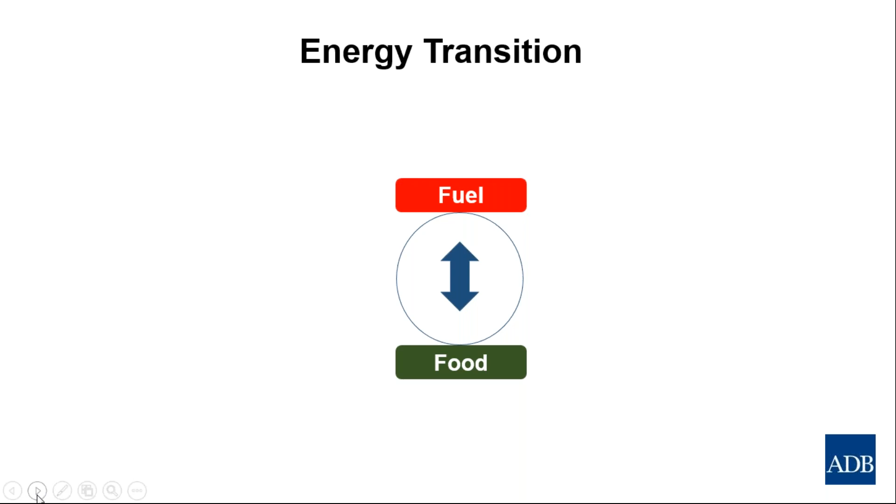When we talk about energy transition, the common thing you hear is food versus fuel. The bioenergy dispute in the United States between ethanol production and tortilla manufacture in Mexico was a great example of it. Most people think that's the big argument, but in fact the argument is a lot more complex.

There's an interplay between fuel, chemicals, fertilizer, food, waste, and energy. Inside that process, where you see this multi-pronged arrow, things transfer from being a waste to being a fertilizer, or from being a waste to being a fuel, or from being food to energy in the case of biogas. There are a number of activities where things are interchangeable, and understanding that interchangeable component means we can spend time and create wealth by transferring materials from one use to another. That's how we define waste to energy: getting the optimal use out of materials in your economy.

We'll start off with biogas. Biogas is very, very old. The process is about 120 years old in industrial processes, but as a human function and as a function of animals, it's been going on for a very long time. The oxygen atmosphere we have on Earth, about 19% oxygen, is somewhere around 600 to 700 million years old. Prior to that, we had a very low oxygen content of 2 or 3%.

The bacteria that lived at those times were mostly anaerobic bacteria, which is why many of them are called archaea. These are the bacteria that naturally occur throughout nature. So what we're looking at is a very simple process to convert carbohydrates, fats, and proteins by hydrolysis into sugars, fatty acids, and amino acids, all the way down to acetic acid, and then down to methane and carbon dioxide. So it's not just one bacteria, it's a family of bacteria.

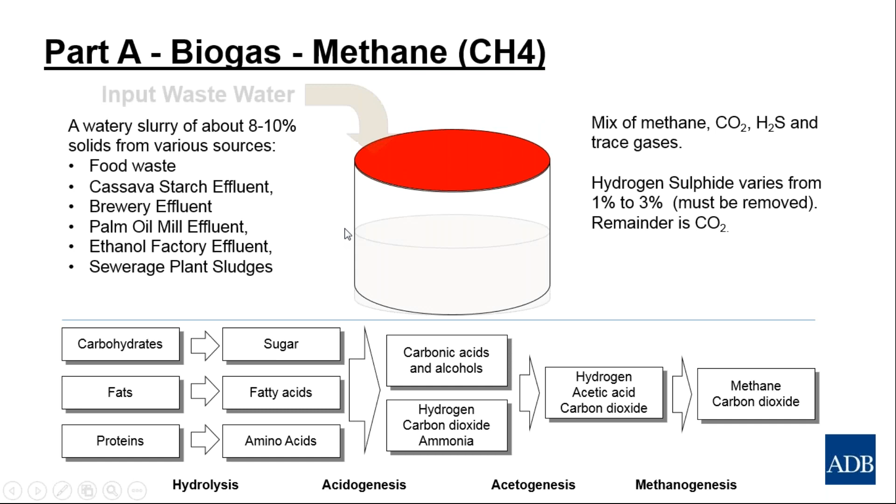To do it is really quite simple: you need a tank, you need a lid, you need to introduce the effluent, normally at about 8%, so it's very similar to porridge. You then need to agitate it. Over a period of time you'll produce biogas because there are naturally occurring anaerobic bacteria. The trick with biogas production is to choose a process that accelerates it by making methanogens come into contact with food nutrients more quickly. And of course you'll get a slurry out of that, which is a biosolid.

You can get that from food waste, brewery effluent. I was recently in Uttar Pradesh to see a sugar refinery on the back of DCM Shriram, a biogas plant on the back of their factory there. Also ethanol production, sewage sludge plants in Karachi, Pakistan. ADB is looking at doing projects on sewage sludge and cattle effluent in Karachi to create fuel for buses on the Red Line, which we're pitching at the moment. So there's a number of uses for this technology that ADB is employing.

One important point is the presence of hydrogen sulfide. Hydrogen sulfide is a very potent poison and has to be removed. It can be removed biologically, but it has implications on equipment when you want to make electricity, or if you're using boilers, it can affect the boiler surfaces.

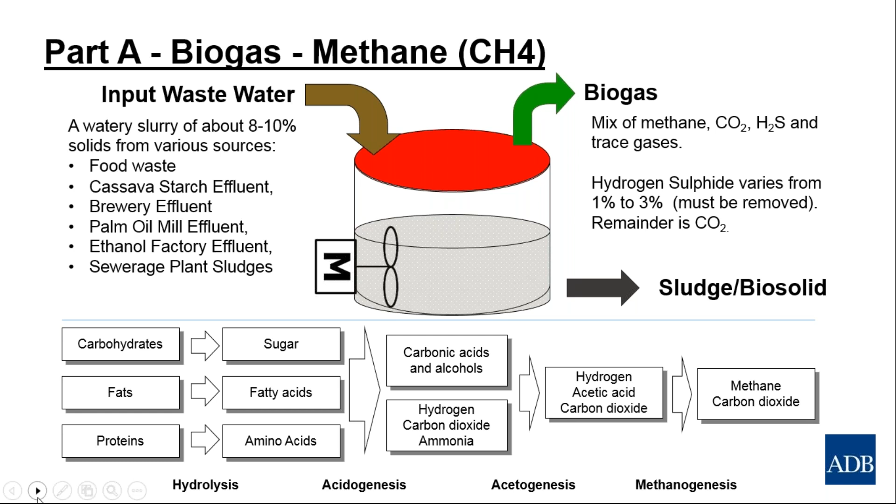These are the sorts of things you can make biogas from, and biogas content can be 30%. Landfills are notorious for having poor gas production, and the gas varies. You can also make it from factory wastewater. There's a lot of work going on in palm oil mill effluent, cassava, ethanol, food processing, food waste, animal feces, and of course sewage.

A key term in the production of biogas is COD, chemical oxygen demand, because there's a direct relationship between chemical oxygen demand and the production of biogas. There are some formulas related to the inhibitory substances that slow it down, but generally speaking, a palm oil factory might yield 65% methane, while a sewage plant might yield 25%. So it's a very well-defined and well-developed industry.

You'll hear some terms about the different types of bacteria. If you look on the right, you'll see a photograph from Argentina showing anaerobes interacting with food. You'll see that the anaerobes are quite small, and they are intrinsically lazy.

Anaerobes will only eat when food is put in front of them. So their life is eat, reproduce, fall asleep, wake up, repeat. It's probably an idealistic existence, but it would be a bit dull.

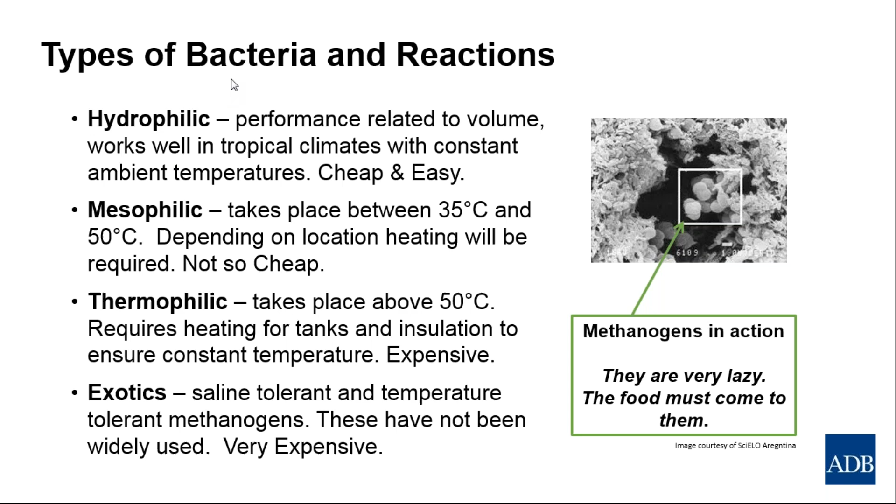So the process of making biogas with an in-ground reactor is quite simple. You mix in the wastewater, you mix in any additional nutrients - in this case there was a root cake available from the factory owner, so we could increase the biological load. You put it in a reactor, create turbulence, and move the materials around so they interact with bacteria. You produce gas.

That biogas is wet and has hydrogen sulfide in it. You put it through a condenser to dry it out, and then through an H2S scrubber to strip out the H2S. You can vary the locations of condensate and scrubbing depending on the use and how you configure your plant.

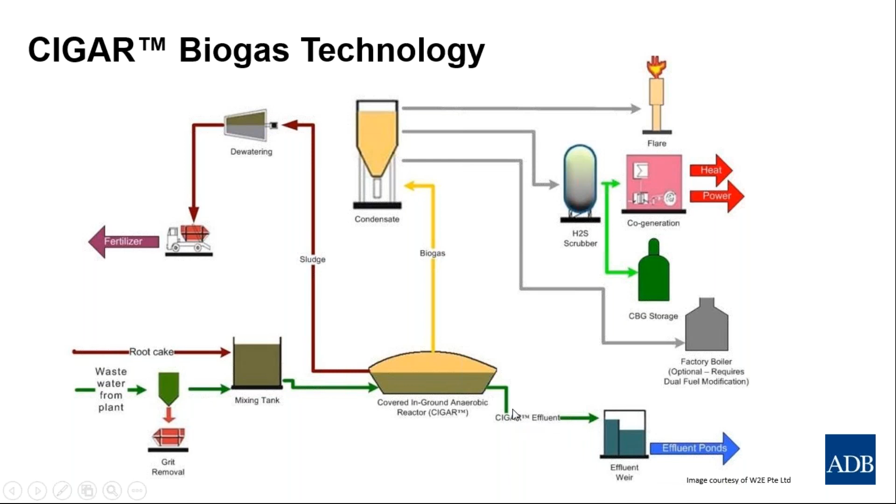It normally comes out at about 3 to 7% solids, depending on how much water you're using, and you want to get it to somewhere about 18 to 24% solids so it can be transportable and usable. Then of course you have some effluent where you might have 5% or 3% of the COD load left, which then needs to go off to ponds to be treated.

So here's some of the numbers, and there are three columns here. One is where the factory was operating at 55% capacity. It couldn't get access to energy because Electricity Vietnam was providing energy from across the border, and with cassava starch, the cassava rots over 3 days. So if you don't have energy for 3 days, you've bought roots and you can't make money. So the factory wasn't making much money.

Just at 55% capacity, by providing a stable electricity source, the project added $800,000 to the factory's profitability. And in fact, it allowed them to purchase more roots, and as a result, it basically created $1.3 million worth of additional profits for the factory owner.

Now, there are a few points I should note. The emissions component here, emissions of carbon dioxide - at that stage, the price the project secured was $14 a tonne. This was in 2008, starting 2009, just before the collapse of the carbon markets.

Those prices are no longer available, but still it's a significant increase in profit just for doing biogas. So if you want to have a look at those numbers, I'm sure you will have some questions, and I'm happy to answer some of those later on after the presentation.

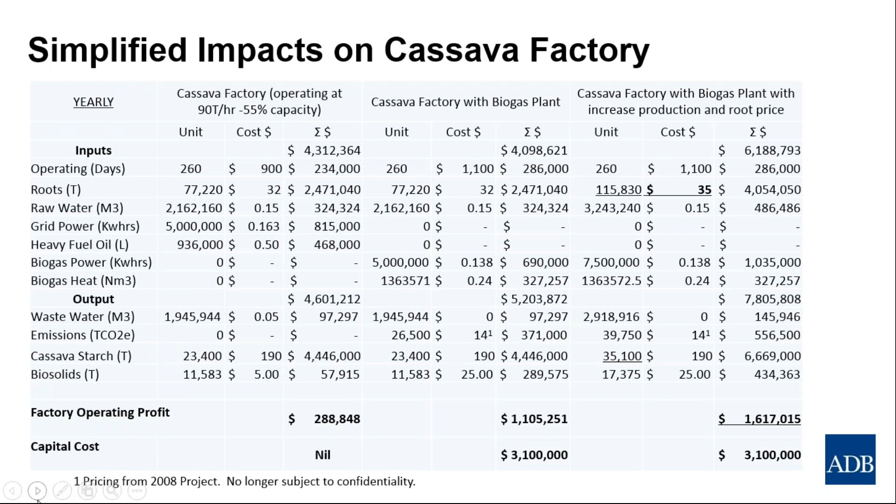If you look at the social impacts, farmers don't want to plant a crop that they can't sell. As a result, because the factory wasn't buying as much root as normal, farmers were planting different crops. When the factory started operating, they started planting more cassava because they knew they could sell it, plus it was a crop they made money on and it was easy for them to manage.

As a result of the factory being upgraded, not only did the factory owner make money, but local farmers made more money, because there was a virtuous cycle: if the factory is more profitable, the farmers will get higher prices or be able to sell to the factory because the factory will want to make more money. There was an increased root supply of cassava, which meant more biogas, which meant more electricity, which meant the factory again was more profitable.

So it stabilized. The factory at the moment is looking to convert its entire output of native starch to make compostable bags and cutlery. They're in discussion with a Taiwanese group.

This project was very interesting because of the biogas plant, this is now a potential target for a buyout where it can be upgraded to a very clean and green asset. So the factory owner not only got an increased profit, but the valuation of the factory went up in terms of what he could actually sell it for. So that deal is in process at the moment.

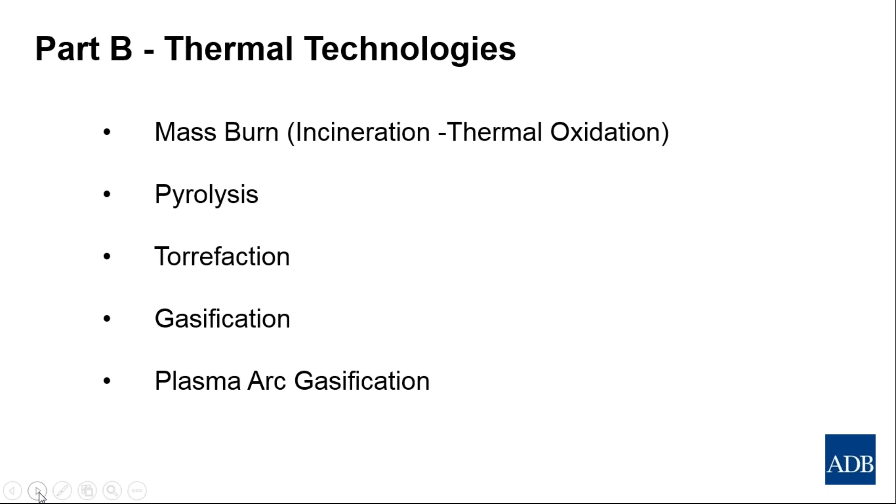And then there's, of course, plasma arc gasification, which everybody raves about, and many companies like Siemens have played with, but it is still not a commercially viable technology at this stage, though it may change.

So mass burn is very simple. You prepare your feedstock, you put it in the boiler, you have bottom ash that comes out, you have energy in the form of heat, which can make steam, and that can be used to make electricity, or the steam can be transferred off for heat use. Then you have entrained gases and entrained particles in the flue gas coming off from the combustion process. They have to be cleaned out, and in some cases you'll have fly ash, which can in many cases contain toxic materials, and I'll talk a little bit about that in a minute.

So it's proven technology. Fixed grate boilers have been used for over 150 years. It's very solid technology. Most of the boilers made out of Japan and China are pretty much using fixed grate mass incineration because it's simple. I know there are companies doing more advanced gasification, and I'll talk about that in a minute, but generally speaking, this is the least cost, easiest operation to use.

Depending on what you have and how your process works, you might have 10% of your mass as ash. You'll have bottom ash, which we were talking about before, that can be used to make bricks. In China, they're making bricks out of it, depending on what is contained in it.

And then there's fly ash. Now, fly ash is a real problem for incinerating anything with chlorine, because when you have chlorine in the presence of oxygen between about 250 degrees and 900 degrees, but especially between about 450 degrees and 800 degrees, you make a family of chemicals called dioxins, and you also make furans as well, which are persistent organic pollutants.

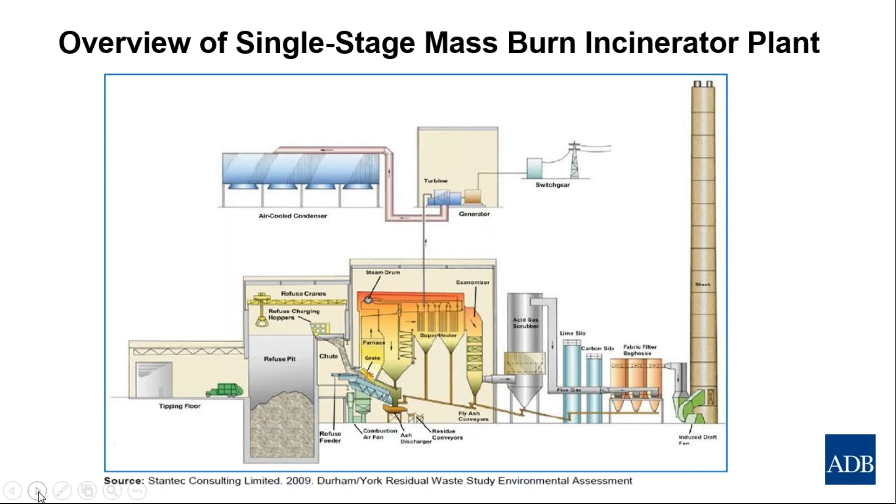I was recently at an incinerator in China, and in front of that they had a very, very large billboard where they were telling in real time what the HCl, dioxin, and other gas pollutants were coming out of the incinerator. I'll try and share that with the audience at the end of the presentation. In China, every incinerator must in real time have a billboard in front showing these results, and it must be certified by a third-party body that the results they're giving are reliable.

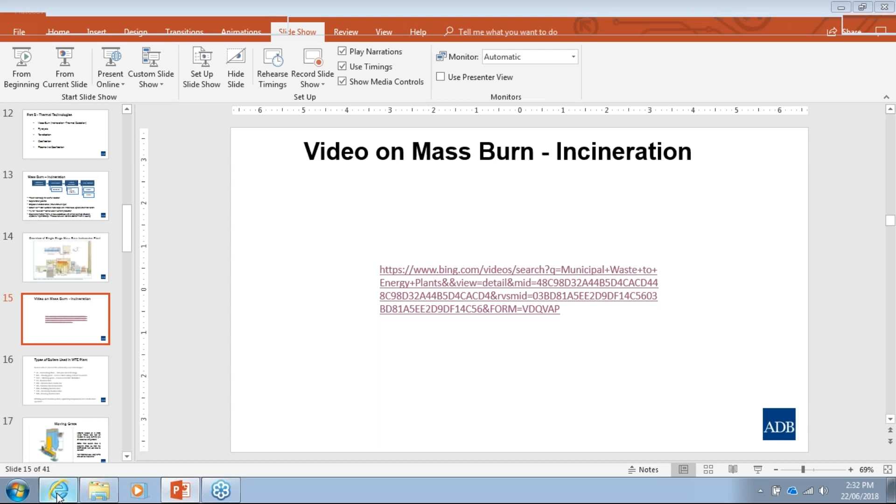This is an incinerator in Finland, outside Helsinki.

Please tell me if this is visible to people. Yes, it's visible. Terrific, thanks, Uma. It's visible, but we can't listen to the audio. Okay, well, I can turn the audio off. That's the easiest way to do it then.

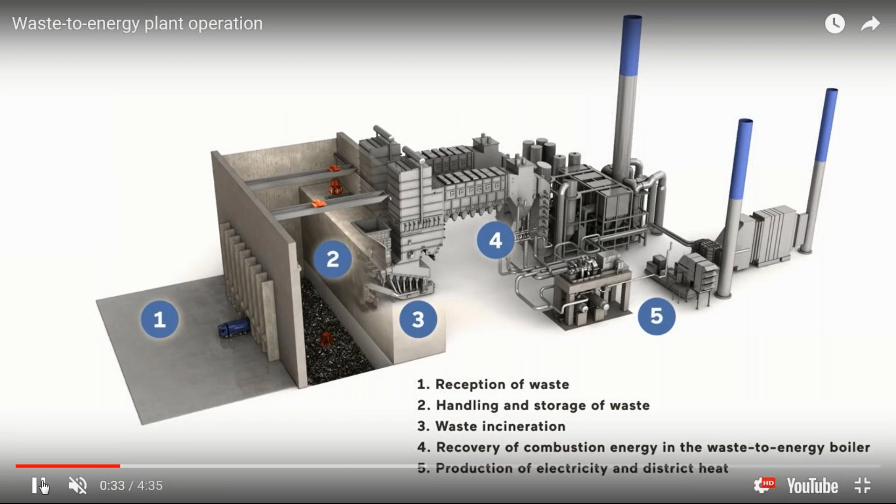So this is the basic structure of the plant, it has a large hopper. It treats about 350 tons of waste a day, about 140 truckloads. It goes into a hopper. The hopper normally carries 2 or 3 days worth of waste, and the operators use the hopper to a certain degree to dry the material out or break the material up.

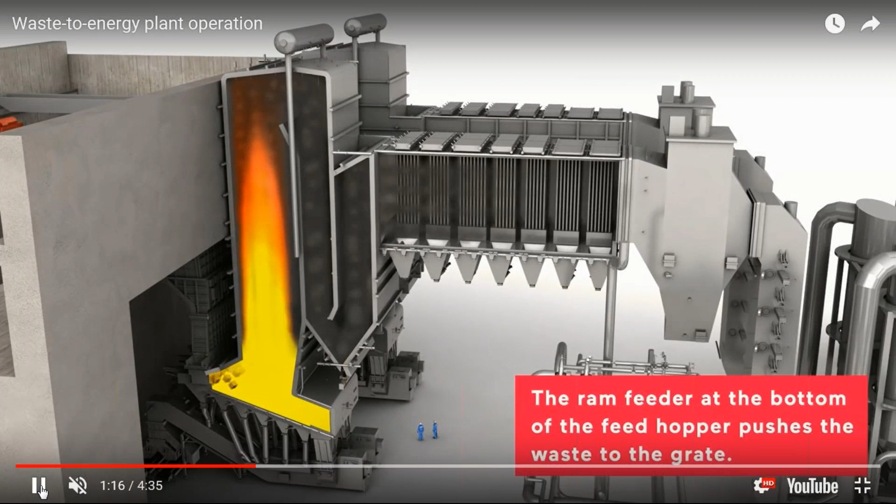It goes into the chute, and then it's injected into the boiler, and kept on the grate for about 2 seconds. That's typically what happens in an incinerator, and that's a good definition of what gets incinerated. So material burns, creates hot gases, and you'll see the entrained particles in the gases going through.

Now, that is a very, very important slide, and I'm going to stop there because it shows that at the surface of the grate, it might be 1100 degrees Celsius, but by the time it's got to some of the boiler tubes at the top of the stack, it's 900, and as it goes through baffles, it goes to 650, then 400, and then 220.

So basically, by the time the material gets to 220 degrees, it's not really producing that much dioxin. But in this process between the top of the boiler and going through to about halfway through this part of the equipment in ash removal, they are forming dioxins and furans. So that's something that means you have to have very good quality stripping of flue gas entrainment. So I'll start the video again and we'll go through.

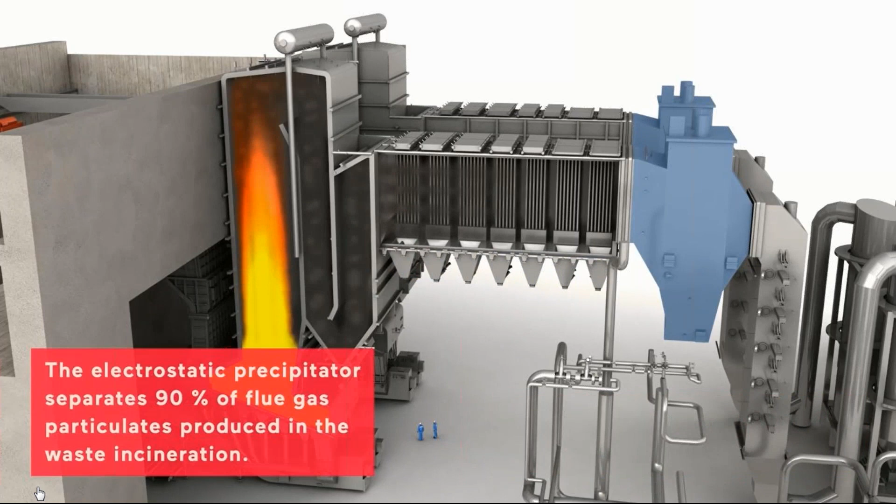So you'll see the gas going through. Fly ash is recovered in different stages of the process. Underneath the grate, you'll have bottom ash, which will fall out, but the fly ash is stripped out using a number of processes. An electrostatic precipitator, which is pretty much a big mosquito coil - I don't know if any of you have those mosquito zapping machines that are very common. ESP is pretty much the same as that. I know it's oversimplifying it, but that's what it does.

Then they use lime dosing. Lime counteracts the acid component of the gases and normalizes the material. And then you have bag filters. Bag filters are very, very important. Inside the bag filter, they'll put a reagent, and that reagent will lock up materials like furans and dioxins, and then they'll come out.

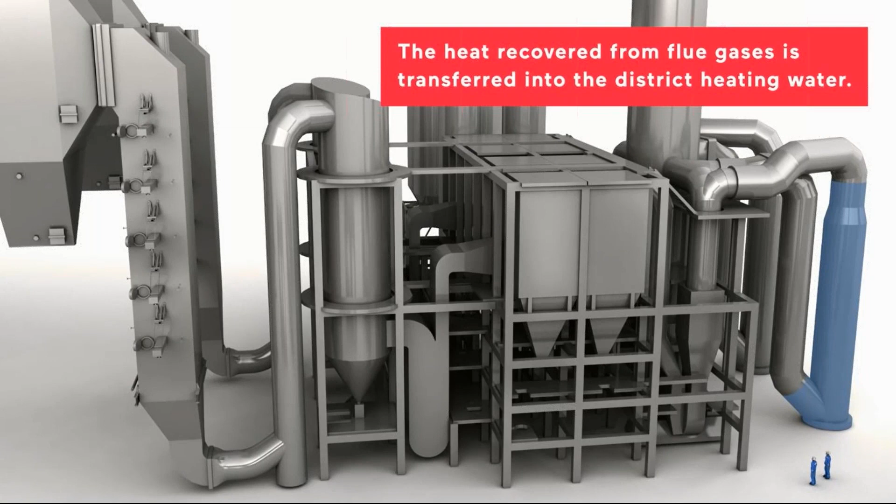Now, this plant has very high energy efficiency. It's collecting heat and then sending that heat around to the community as district heating. Very, very important process in Northern Europe because obviously heating costs are a tremendous cost. So by the time the gas gets released, it's about 50 degrees Celsius, which is still quite warm, but it meets all the European directives for release of gas.

So the issue with incineration is that whilst the process is energy efficient, it's expensive to build an incinerator. You also have an issue with fly ash, and fly ash is the limiting factor in its success in rollout. So a lot of the work we're doing at the moment looks at new solutions for how we can deal with fly ash, how we can chemically immobilize it, what we can do in terms of creating ceramics, and using hot isostatic presses and other activities.

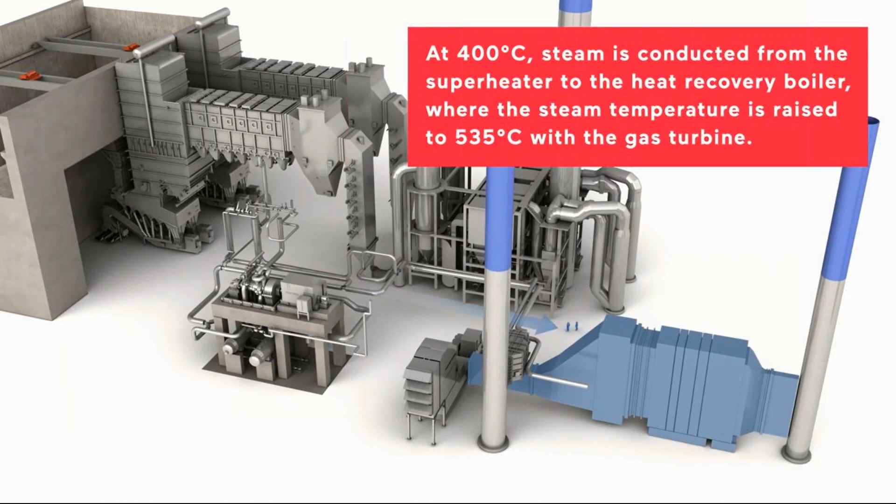So this talks about the heating and cooling system. Basically you're stripping heat out of the gas and using that, and then it goes off to a turbine, producing electricity for the local community.

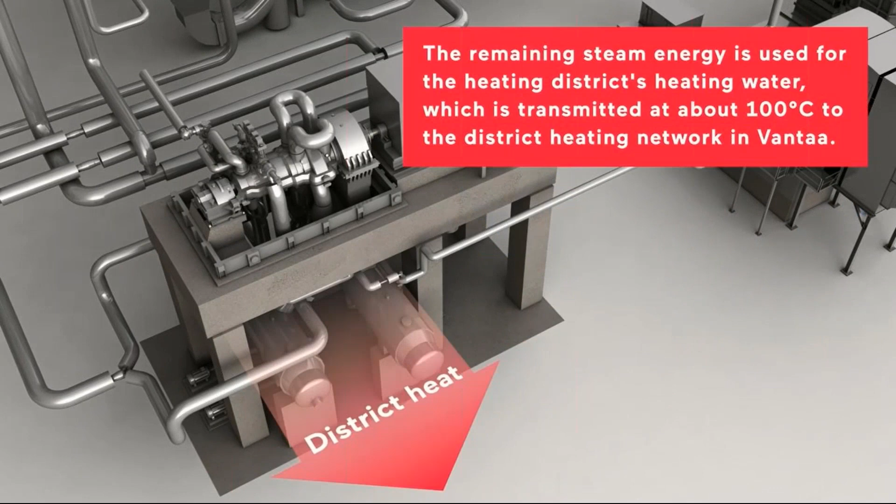But the district heating component of this makes this technology the most attractive. In China it's very well adopted because of its capacity to provide district heating. One of the projects we're involved in is looking at providing district heating and options for people currently using coal in the areas around Beijing, Tianjin, and Hebei. There's a large amount of investment in getting people area heating during the four months where it's very, very cold in northern China.

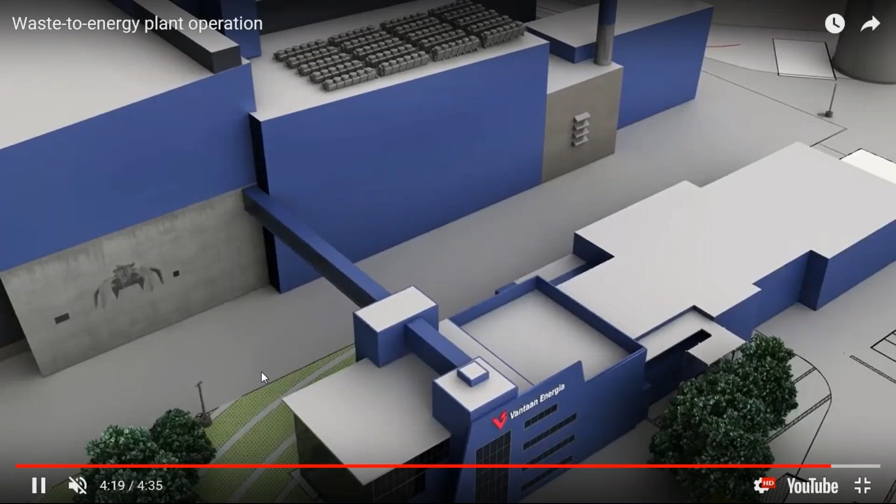This means they don't burn coal, so there aren't the levels of pollution that currently occur in Beijing. Delhi certainly has that problem too - I was in Delhi about four years ago and the pollution was very, very bad. So perhaps that might be some learning that can get transferred across.

So let's go back to the presentation, and I'll restart the slideshow. So we've done that slide.

Now talking about grates - this is simplified. I know there'll be experts on grates in the audience who might say this isn't exactly a good summary, but if so, I'd be delighted to have your comments if you want me to change this presentation internally. There are different types of grates: fixed grates, moving grates, vibrating grates commonly used in palm oil production for boilers, fluidized beds, and gasifiers actually use fluidized beds as well. So there's a step between being a boiler and being a gasifier, even in these technologies. The technology varies in terms of residency time, operating temperature, and combustion dynamics, and those are the determining factors of which technology you might want to use.

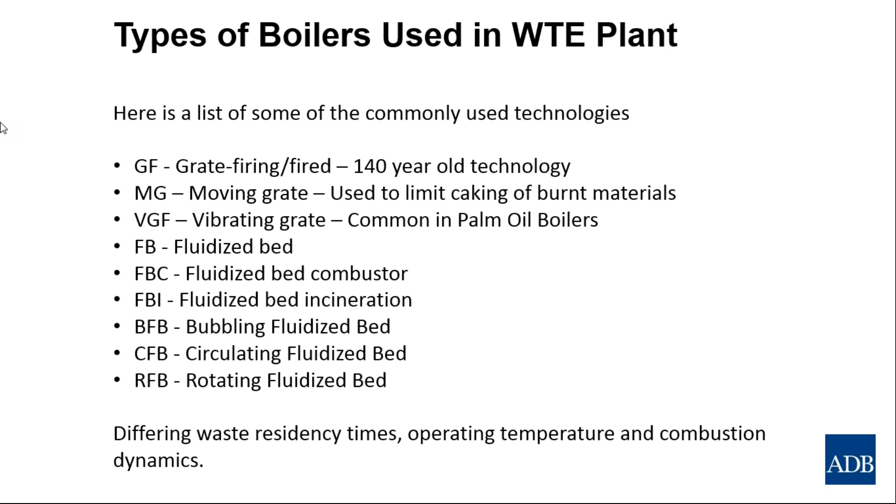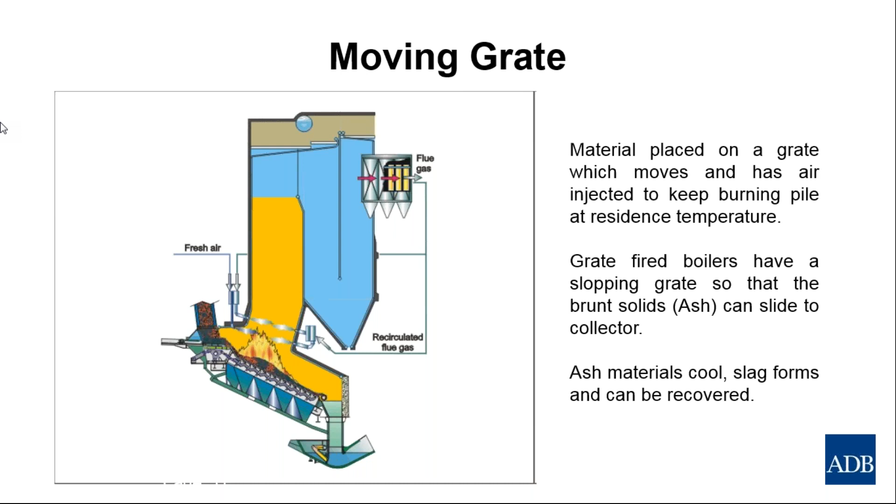So a moving grate is pretty simple - it's basically placed on the grate and it burns, that's pretty much it. The bottom ash comes off, and you may have some slag depending on what's entrained in the materials. If you're doing something simple like wood chips, empty fruit bunch, or cassava, you won't have a lot of gas treatment needed because you're not likely to have entrained dioxins or entrained chlorines. But if you look at a bubbling fluidized bed, you'll see that process varies.

Excuse me, sorry, we just had a power outage. Can you hear me? Yes, I can hear you and I can see the screen as well. We just had a power outage in Manila. Oh, it's fine, we at South Asia are also used to these power cuts. Yeah, I know, but it was pretty good because the power came back on in literally a quarter of a second, so that was very good.

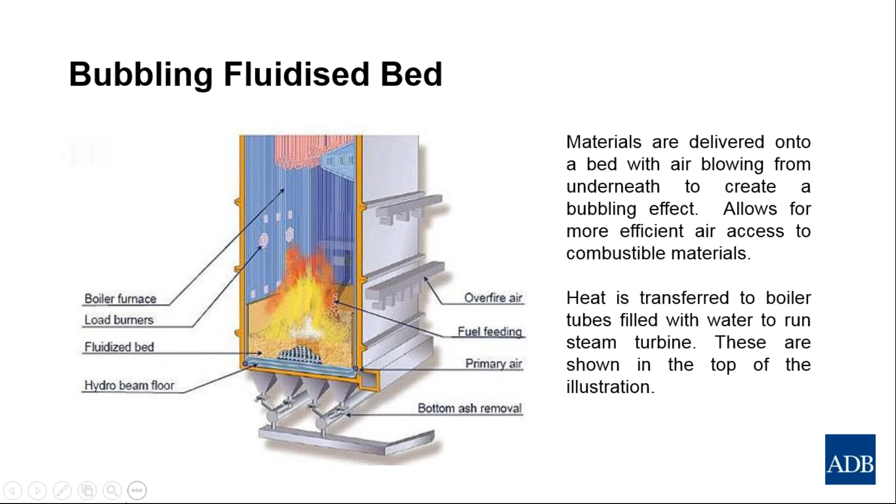So key terms - many of you will know these, but I'll go through them again. Megajoules is a measure of energy: high heating value, lower heating value - how that is determined varies. There's a difference between the high heating value and low heating value of a material. Nitrogen oxides - NO2, NO3, NO4, SO2, SO3 - sulfur oxides. CHONS is very important: the relative proportions of carbon, hydrogen, oxygen, nitrogen, and sulfur are a determining component of which particular technology might be better.

Heavy metals - everybody talks about them, but here I've actually specifically spelt out what they are: cadmium, mercury, lead, arsenic, manganese, chromium, cobalt, nickel, copper, zinc, selenium, silver, antimony, and thallium.

Just as an aside, I was recently in the Marshall Islands looking at a project, and there was a technology introduced there to mass burn plastics waste in the open, which we gave some very strong commentary about, saying that wasn't a great idea. When the ash was tested, it had a very high chromium content compared to everything else. That was quite a remarkable outcome, we thought.

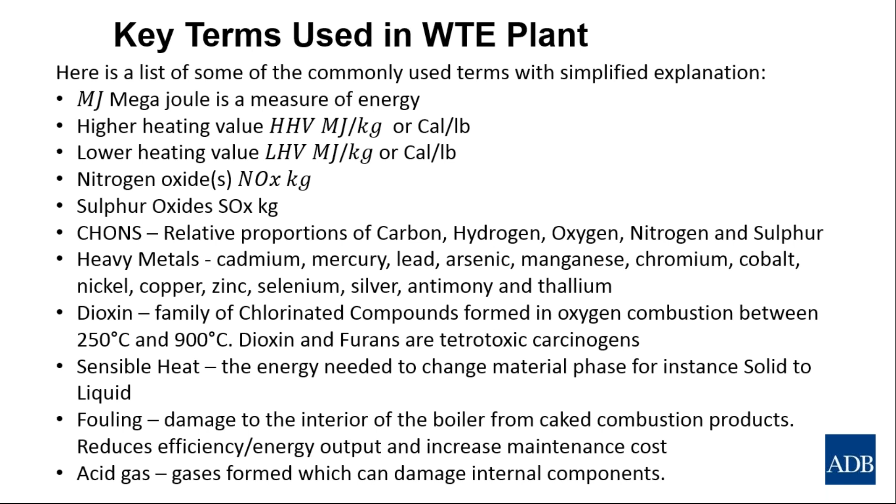Fouling is where you get caked materials that look like they're sandblasted onto the interior of facilities, and that has an implication on the operations and maintenance component. Acid gases are gases formed which are quite damaging to internal components, and that's because of the presence of sulfur and other materials.

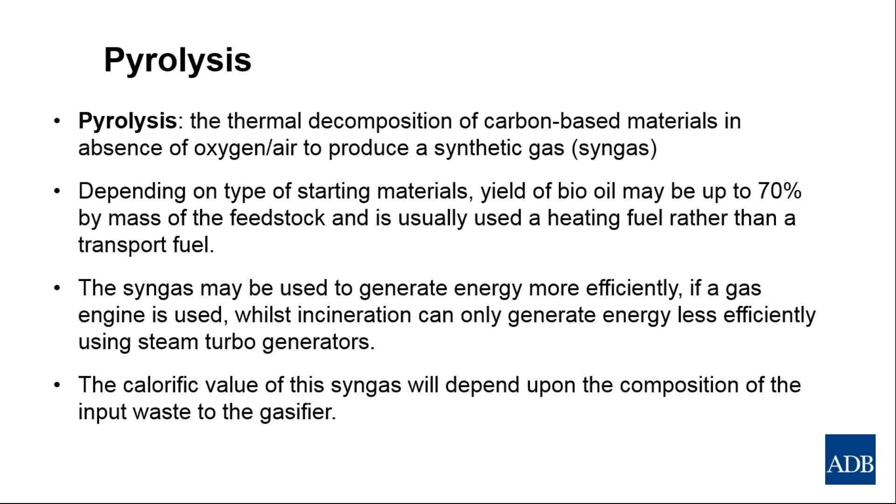Pyrolysis is thermal decomposition in the absence or near absence of oxygen, and it produces syngas. I know that India, especially Ankur Scientific, are extremely good at making small gasifiers for agricultural applications like rice husk - they're very popular in Southeast Asia. So this process of gasification producing syngas is well known. With pyrolysis, you don't make as much syngas, you actually make more bio oil, and you also have tars as well. The next step up is gasification, and that process is very popular in Southeast Asia. Again, it's just a difference in temperature and a slight difference in process, but they're a family of materials.

Now, people will tell you, 'oh, we don't have any oxygen, so we don't create dioxins.' That's not entirely true - you can't say they're not produced, you can only say they're below detectable limits. I've seen documents from suppliers in various parts of the world claiming no dioxin is produced, and I think you should be very careful of that, because there's oxygen in the container, in the materials, when you start the process.

Torrefaction is another process which occurs at a slightly lower temperature. It's used extensively in Australia to deal with dead animals from a biosecurity point of view. Large chicken farms and large beef farms have a lot of dead animals, and a lot of waste, which is obviously a biohazard under Australian law. So what they do is treat it in a pyrolysis process, and that's then able to be used as a high surface area biochar, which is very useful for entraining nitrogen-fixing bacteria and other things in the soil. So it's sought after by farmers to buy that product.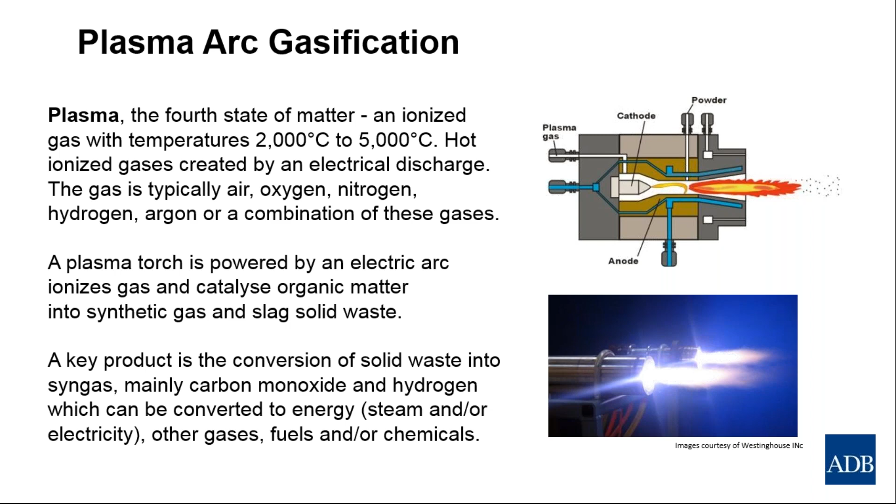Plasma arc gasification - if we lived in the world of Star Trek, this would be the ultimate technology. It decomposes everything down to a glass slag and maybe a bit of entrained metals. The only problem is it's about 4.5 to 6 times more expensive than currently available technologies, and also extremely difficult to operate. In the mid-1990s, Siemens had an explosion in East Germany that killed 6 people, 2 of whom were PhDs working on the technology. It was originally developed by the Russians, as my understanding goes, and the space shuttle actually uses a plasma arc made by Westinghouse, injecting a spark to light the bottom of the space shuttle so it can take off.

This is a process from a project in Malaysia, on the site of a paper company in Pahang, where they have fuel storage. The most important thing for these technologies to be optimized is the handling and feeding into the boiler.

In a large municipal solid waste incinerator, you have a little bit of flexibility about what you can do, but in these processes where you have a fixed biomass, fuel handling is very important to get optimal results. It's basically four stages: fuel handling, steam boiler, steam turbine and generation, and then water treatment within the configuration.

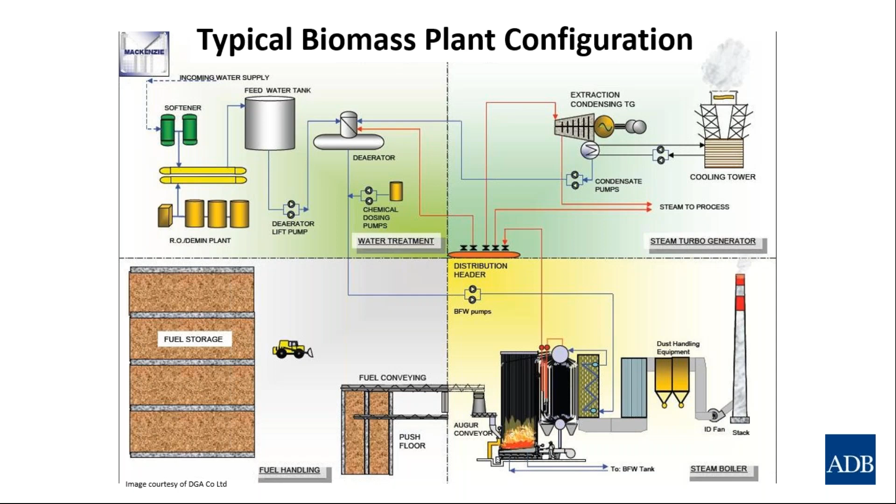Here's some numbers from this project. Again, it was 2008 - I can't show you things from the last couple of years because many are still subject to confidentiality, I must apologize for that. But three mills in this particular area were going to collaborate, and they made about $300,000 a year selling their empty fruit bunch off as fertilizer, which was good money shared amongst the people who managed the mill.

But if you look at combining the empty fruit bunch from these three factories, you could actually generate about 10 megawatts of exportable electricity, meaning operating profits of about $9 million based on the carbon price at the time, maybe 8 million without it. Electricity was in shortage in this particular area, so the payback was about 3 years - it was quite an attractive project.

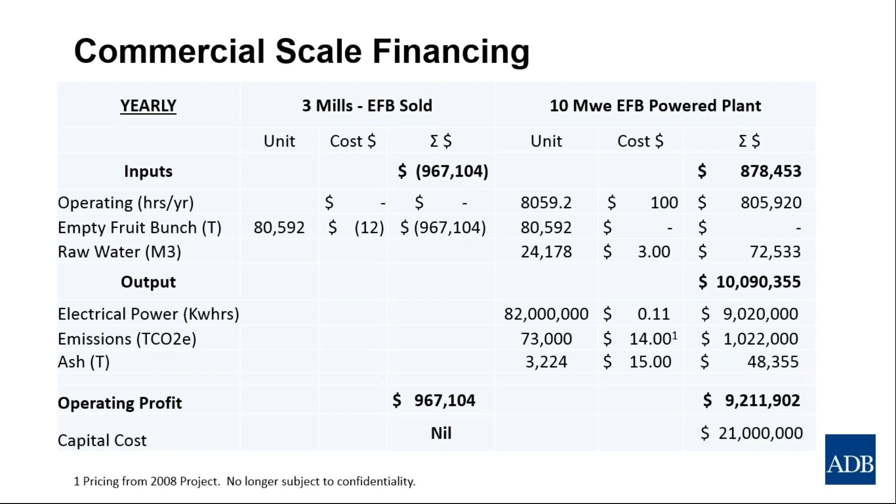A number of these projects were done. This one wasn't, because the three mills couldn't get on and had problems communicating with one another, which is a great pity.

When we talk about palm oil, I put this in for the edification of my colleagues. If you look on the right, you'll see that's actually peat land that has palm oil planted on it. Peatlands are major sinks for carbon, and anyone who's lived in Singapore or Malaysia has seen the haze caused by burning of these peatlands, which burn for weeks. That's a really big problem for the palm oil industry, and they haven't managed to create a functional business model to explain to international donors how that might work.

On the other side, there's a lot of people who've been lifted out of poverty from this. About 10 years ago, I remember sitting in the living room of someone in Central Sumatra telling me how 3 of his kids went to university and 4 ended up joining the military and getting educations because of his involvement in palm oil. So I think you need to look at the positive and negative sides of it. There's still a big argument about palm oil, but I think it's not so black and white.

As I said, the most important thing is fuel preparation for any thermal technology. If you have a gasifier and pyrolysis, you have very, very tight margins on the fuel and the moisture content.

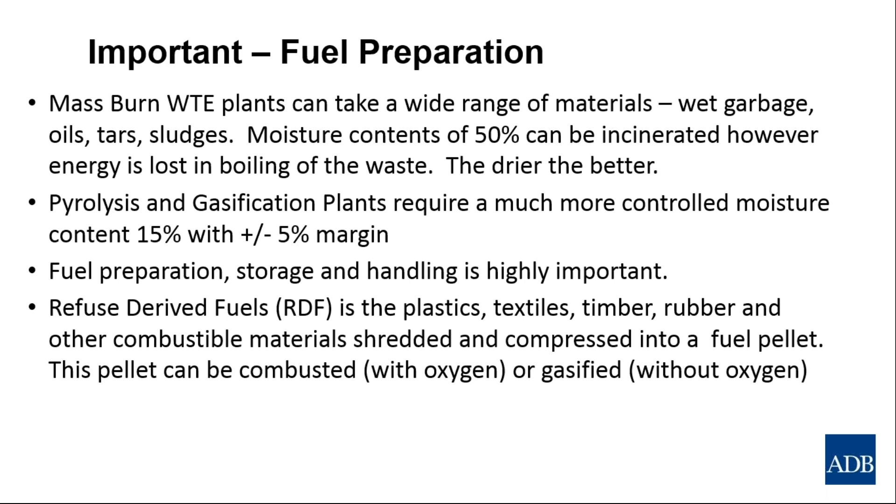One thing I haven't gone into much detail on is refuse-derived fuels. When you have plastics, textiles, timber, rubber, and other combustible materials, they commonly contain a lot of chlorine, specifically textiles and plastics. If you turn those into fuel pellets, you need to combust them in an area with controls for dioxin. But one other option is to use them in cement production - sell them off to cement factories, since they commonly burn car tires to generate heat for the cement-making process. So the RDF component works very well with cement mills without having to build large pieces of infrastructure.

Next is municipal solid waste - this is a different approach. This was partially tried in a number of places in India, and I'd be interested to get feedback from the audience. They had great difficulty operating the digesters because there were obviously some contaminants in the digesters, and also the digester is an agricultural, biological process.

It's not really like a car where you turn the engine on and the car runs. Sometimes the gas is produced, sometimes it's not produced as much. So it's a bit more like managing cattle than actually driving a car. To manage this process, you need a little bit of subtlety and a bit of patience.

But effectively, you take waste, you strip what you can out of it, you shred it, you pulp it, or you can put it through a trommel screen. But ultimately, what you want to end up with is an entrained amount of organics that go into a digester with as little plastic and as little contaminants as possible.

The process is very similar to what we talked about in the cassava factory, probably with a few more controls. But then you have a market for the recyclables. So it's a choice between building a large incinerator or building a smaller biogas composting type approach.

Many countries, especially India at the moment, and partly because of the closer relationship with China, are actually building incinerators to change the way people collect and run waste. We're seeing these types of projects come in, and we're not sure how that's going to work in India, because South Asia obviously has some very clear supply chains for the collection and handling of waste, so we're still working out how that will deliver.

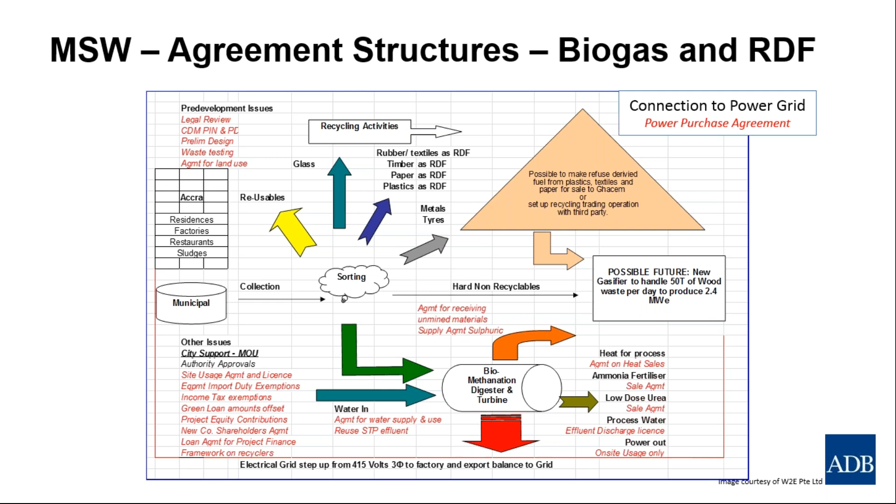So it's not an easy technology, and it's not an easy business to be in. It's a very important business, but it hasn't got the level of attention from the international community that perhaps it should have. In Ghana, they couldn't afford to build a large incinerator, but they could get access to about $56 million worth of capital cost. This project had an IRR somewhere around about 14 or 16%, which is not great, but it certainly passes the hurdle for economic analysis.

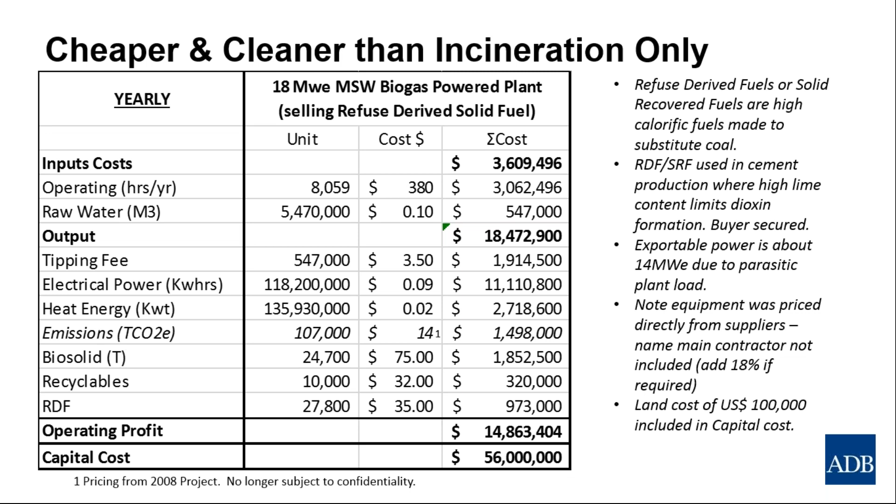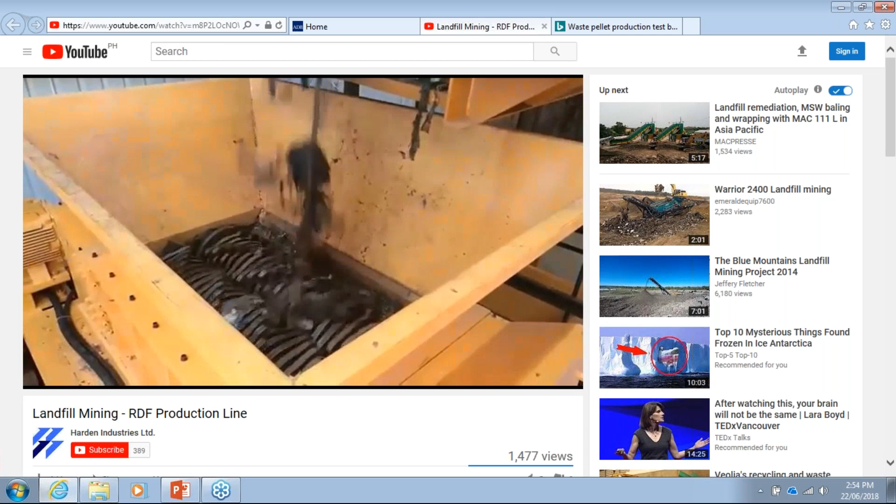That's not a place to fall into - certainly a very, very dangerous piece of equipment. Then that gets chopped up to a smaller size. They may even chop it up further.

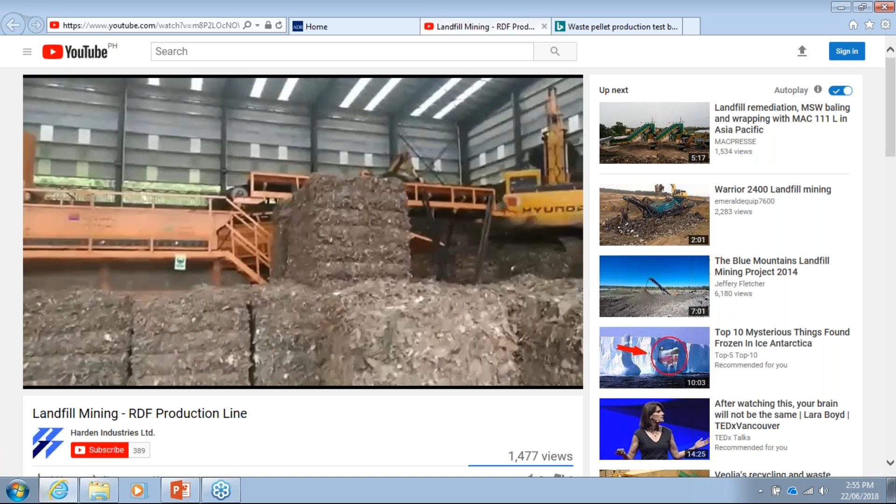And then they have a number of choices. In this particular video, this is a landfill that they've dug up, and then they're taking this material and baling it to turn into meter by meter bales. You'll see them baling it here, and then that gets shipped off to be incinerated. I'm not sure what the use of that is - it may be an incinerator, it may well be a cement factory, but that is a common process.

Notice the guy's wearing a lot of PPE. He's wearing safety equipment because there's a lot of material in there that's perhaps not so great to inhale.

Okay, so then I'll show you another one, which instead of doing a small bale, does a pellet. So instead of doing a meter by meter bale, you do a pellet. This is a machine in Thailand - all it is, is a rotating die, and it just makes a circular pellet, and you'll see the entrained solids and the plastics in there. That's a very small machine, and it makes about 100 kilos of pellets an hour.

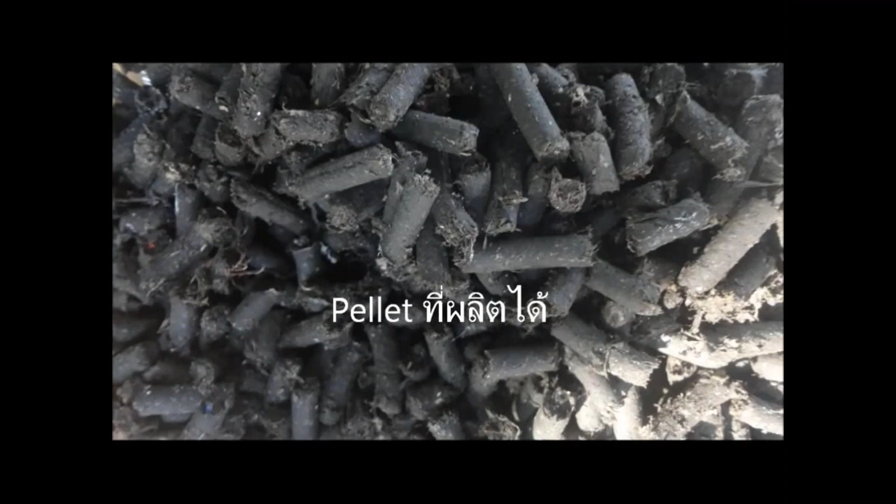That's used for shipping. It's a lot easier to ship in bags than to run the bales. Plus bags don't leak as much, and they sometimes use cassava starch to bind those pellets together, mixing it in so they have a discrete form. That pellet is a lot easier to burn because it's more consistent.

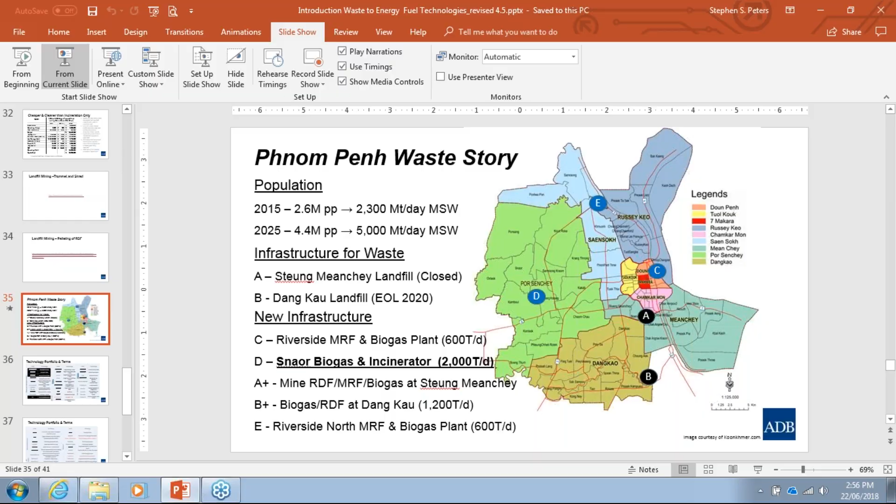So that's another type of technology. I'm going to turn that off and go back to our presentation. I wanted to talk very briefly about some planning. Phnom Penh, the capital of Cambodia, is experiencing phenomenal growth.

In 2015, there were basically 2,300 tons of waste a day. By 2025, they think it'll be more than double that, at 5,000. They currently have a dump site at Steung Meanchey, which is closed, right on the edge of the very densely populated Doun Penh, Chamkar Mon area. With help from the World Bank, they decided to build a landfill at Dang Kau, further out of town, actually very close to the Killing Fields, if any of you have been to Cambodia.

Sorry, I'll go back. Dang Kau is now almost fully used. It's very unlikely it will be able to be used in the 2020s. So they need a new solution, and quickly. A number of organizations have looked at planning this.

They need some new infrastructure. About 40% of their capacity needs to be an incinerator/biogas plant. The plan was to put that in a place called Snaor. It's very difficult to speak Khmer, but Snaor is outside of town. While it's not particularly population dense now, it will be by the 2030s or 2040s.

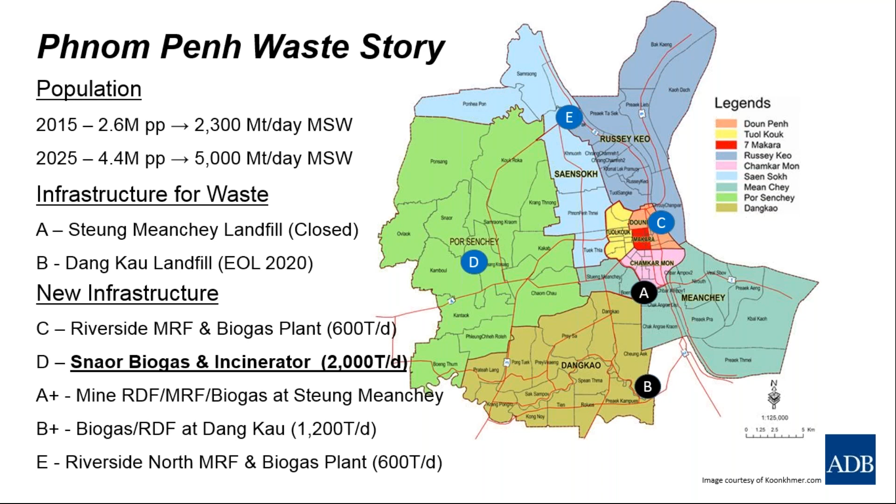Building a 5,000 tonne incinerator means trucks bringing 5,000 tonnes a day of waste into one area. That centralized model doesn't particularly work well at that scale, because it means a lot of rubbish trucks on the road, and it has health implications.

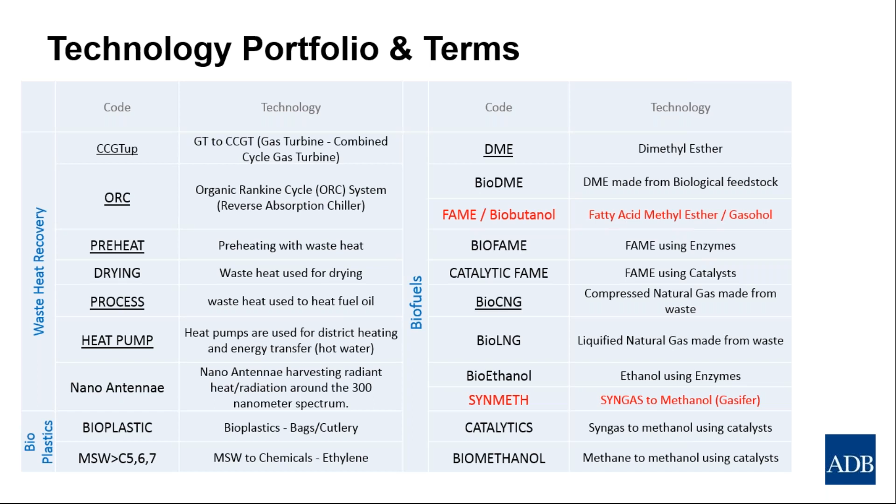I wanted to talk a little bit about innovation. This is a project in Sweden, which is a biorefinery. They take materials, turn them into gas, then strip the CO2 from that gas to make liquefied natural gas for shipping, and also compressed natural gas to run cars.

That makes financial sense in Sweden. Now, obviously, that's not going to make financial sense in countries without a CNG industry. But if you look at the penetration of CNG in Pakistan, you would be wondering why Pakistan is not doing more of this type of work. That's some of the things we're trying to look at and assist people to demonstrate those projects so people can get the confidence to do them.

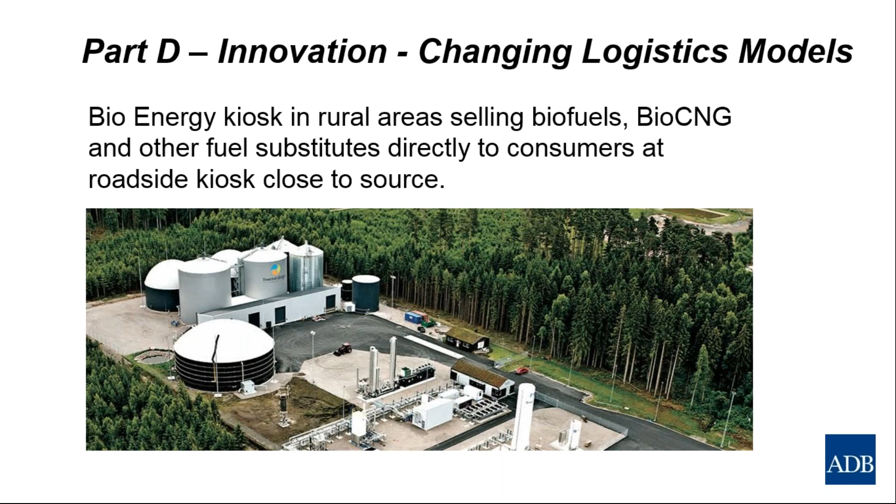There's a really wonderful group of projects going on in Rotterdam at the moment. In fact there are 2 organizations, but the biggest one, Enerkem, a Canadian company, is looking at taking waste and converting it into methanol and some base level plastics. This project has $1 billion worth of investment, with Air Liquide and AkzoNobel as shareholders. So it's a very, very large project.

That project is going to, I think, in 5 to 10 years, become a very common way for people to treat plastics and other materials that can be used to recycle and recover plastics so they're used again. Because we have a very large backlog supply of plastics currently ending up in the oceans, and we can look at making money out of those and investing and making returns.

This is more than likely to occur in free trade zones and around ports. That's our expectation of how that development might go forward. We don't think this will be done at small city level or by municipal authorities. We think it'll be done by multinationals working out of these free trade zones. That's a process I'd suggest you keep your ears and eyes open for.

So building a very, very large incinerator then means that these type of projects can't get up or get access to materials. That's why we're suggesting don't build a very large incinerator, just build an incinerator for the things you absolutely have to incinerate.

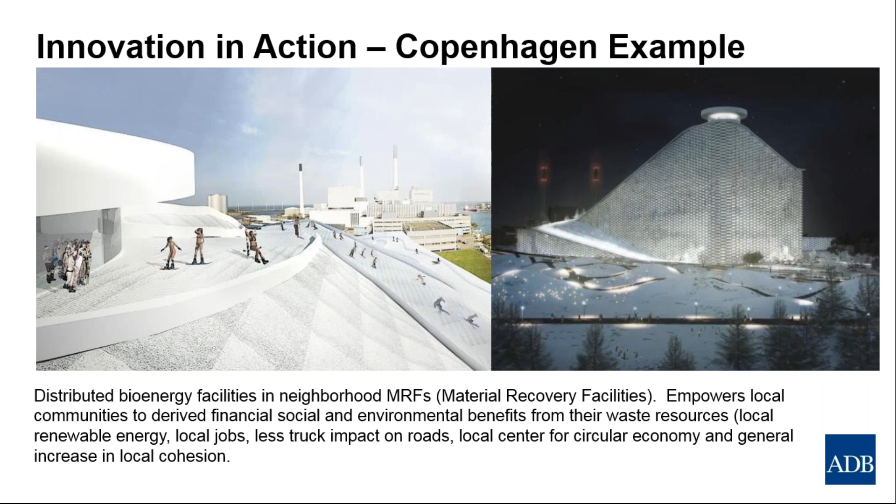So on that note, I'd like to thank you for your time. I'm sorry if I've gone over on the presentation, and I'm very happy to take your questions. Thank you very much.

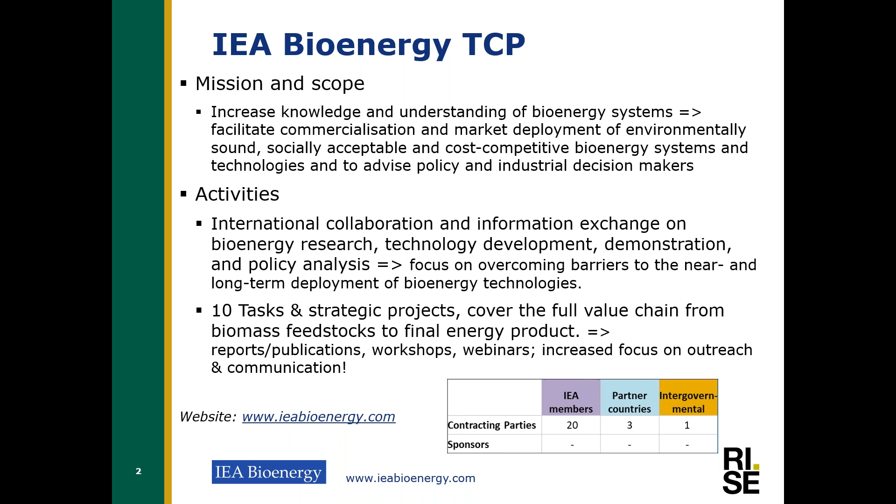So Task 36, that I'm the leader of, looks at integration of energy recovery into solid waste management. We are also moving a bit more towards the role of waste to energy in the circular economy, hopefully for the next triennium. The work is done mainly through 2 meetings each year, associated with workshops and technical visits. We're also doing some smaller studies or case studies that we publish as task reports, which are or will be available on our webpage. I've given 3 examples here just to show you what it could be.

The current members are France, Germany, Italy, and Sweden, so it's very European right now. For the next triennium, we hope to get Australia, the US, and maybe Canada, and we are looking for more members. At the last EXCO meeting, actually, India participated, and we are hoping that India will join IEA Bioenergy. I personally hope then that they would also like to join Task 36, looking at waste to energy and waste management.

RISE, which is my employer, is Research Institutes of Sweden. We are fully owned by the government of Sweden. We are a research institute, a polytechnical one, and the largest one in Sweden.

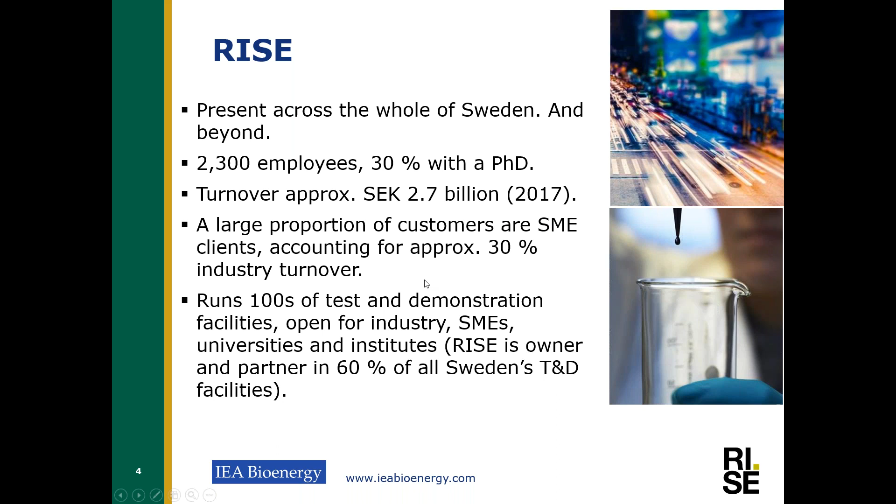We are working in a lot of areas, so this is just to give you an example, and you will get the presentation afterwards. I won't go into the details, but we're working with anything from life science to energy to vehicles and vehicle safety, and concrete, glass, wood, most of the different materials that are around, graphene, and other things.

Waste refinery was mentioned before. That's one example where we are working together with academia and industry. Today it's a strategic network, and it has been a researching network as well.

It's cooperation between academia, universities, institutes, society, and industries. In this case, society is some municipalities and waste management branches or administrations of the municipalities. We are working together in common projects, trying to develop common projects where we partly get financing from our partners in the network, but normally applying for publicly funded research projects as well.

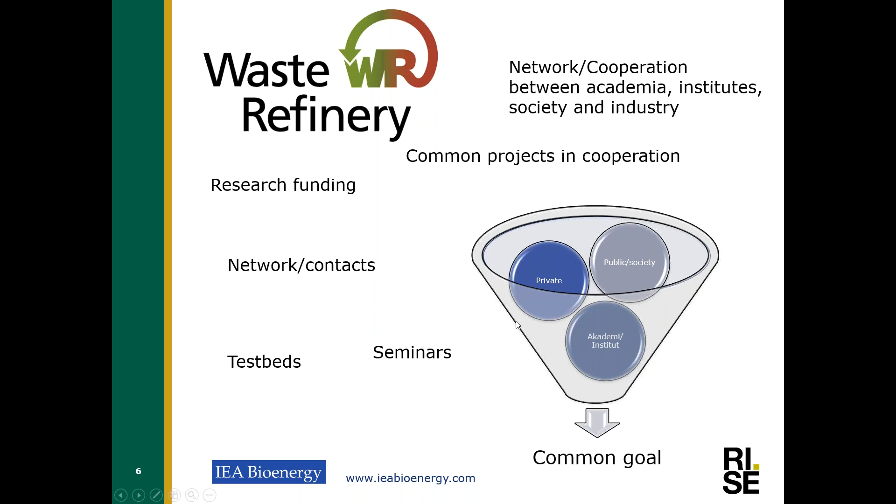So that's just a brief overview of the background, or my background. I usually, when speaking about waste to energy, start with this picture. You will just in a minute understand why.

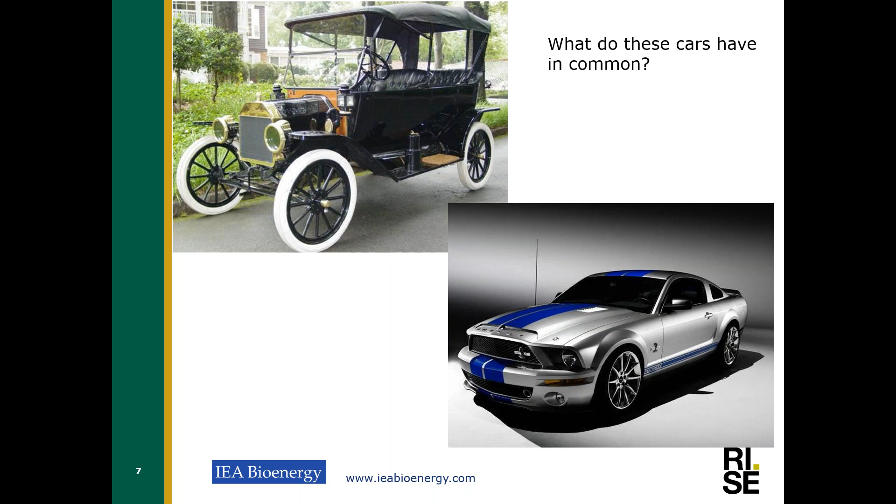I usually ask people what do these cars have in common? Well, actually, they are both Fords. They have 4 wheels and an internal combustion engine, but more or less that's where the similarities stop. And they have about as much in common as these.

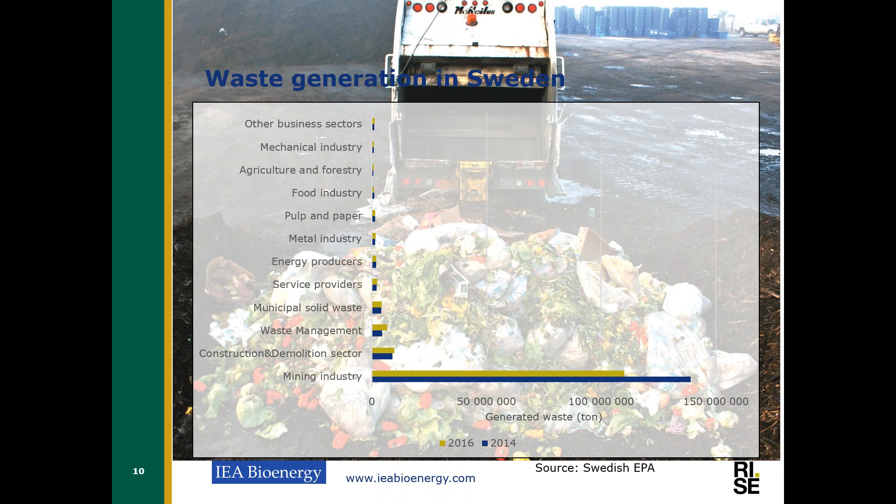If we look at the waste situation in Sweden, we have one major contributor, and that's the mining industry. Mining is a very large industry in Sweden, and it generates a lot of waste. However, I won't go into that because waste to energy in that part is not that interesting. I will focus more on municipal solid waste and some industrial and construction demolition waste.

If we look at municipal solid waste in Sweden, it's around 4.5 million tons a year, so around half a ton per capita each year. If we look at treatment today, more or less 100% of the waste is collected. Some waste is, of course, dumped in some places, but it's not a very large problem in Sweden generally. There are well-functioning services for the collection of the waste.

So we're around 50% going into material recycling and biological treatment. That's not the same as 50% being material recycled, but that's what's collected for material recycling and biological treatment. Then we have approximately 50% going to waste to energy. In the biological treatment, you also have some waste to energy because of anaerobic digestion, but since we're recovering nutrients, that's pointed out in statistics as material recycling, not waste to energy or energy recovery itself.

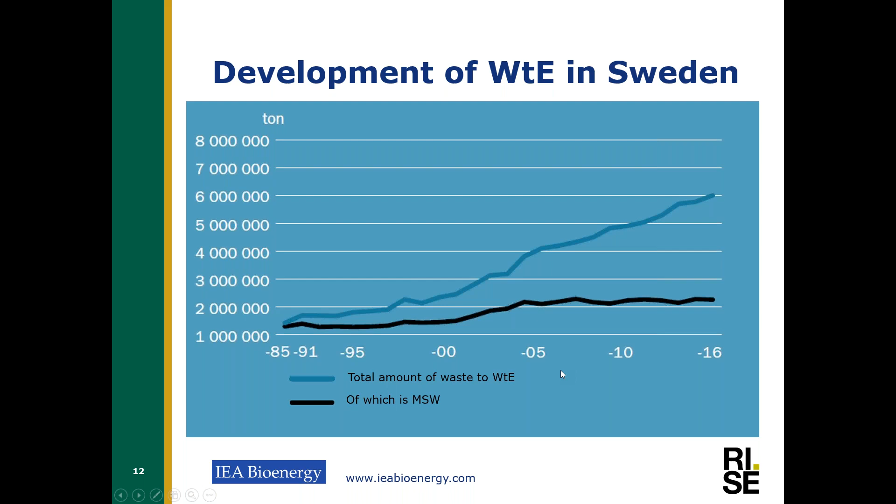So for a long time there was more waste than we had capacity, but in the economic crisis in 2008, that changed. We saw decreased amounts of waste being generated, as well as at the same time the capacity was expanded quite a lot.

So now the Swedish plants, as they say, are offering a treatment service to the rest of Europe. It's mainly Norway and the UK currently, but there have also been other countries delivering waste to Sweden. In this case, the plants are not buying waste, or they are buying it at a negative price, so they are taking a gate fee to receive the waste.

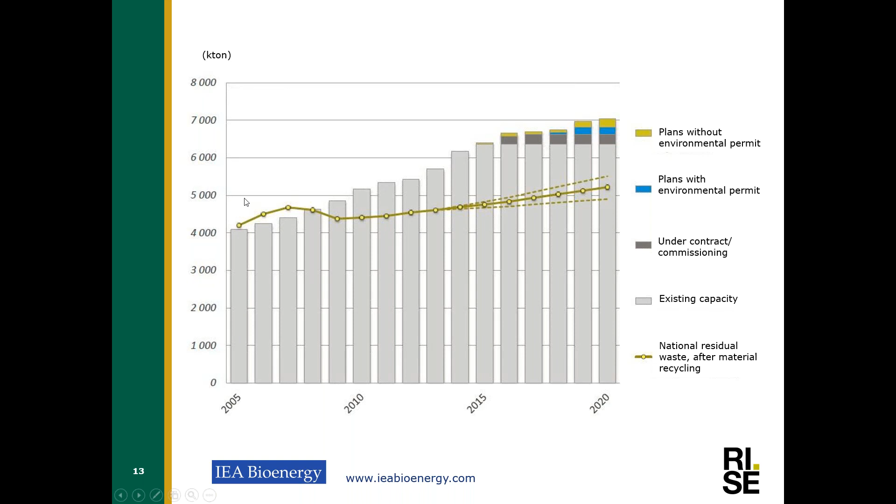So most of the energy recovered is in the form of heat. We also generate electricity, generating a bit more than 15 terawatt hours of heat each year. It's also going to industries, like there is an ethanol plant being provided heat from a waste combustion facility. There is also a paper mill being provided heat from a waste energy facility.

And when we look at the biogas, we are mainly converting it into vehicle gas, because that way we replace fossil fuels directly. When we use it for heating and power, it's competing with biomass, water power, and other renewable sources. So the environmental benefit has been greatest with vehicle gas.

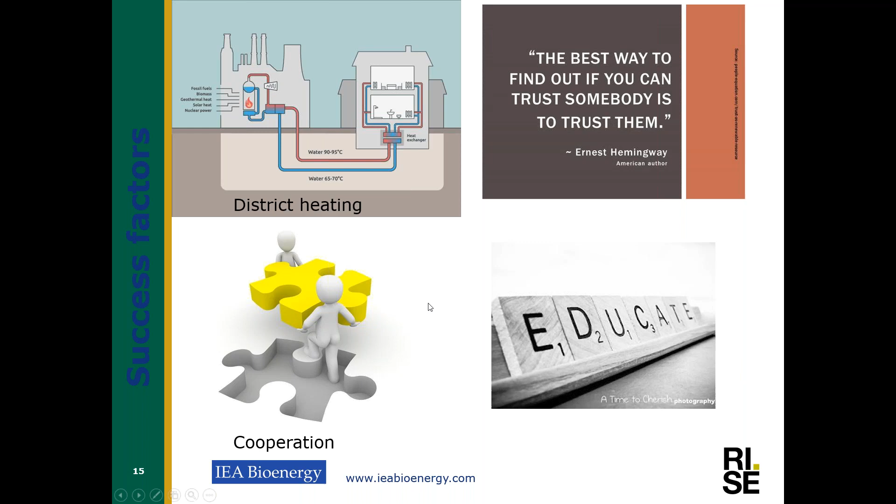Our previous speaker also mentioned something, and it would come back here: looks do matter, even if they say it's the inside that's important. Looks do matter, and it's a trend we see.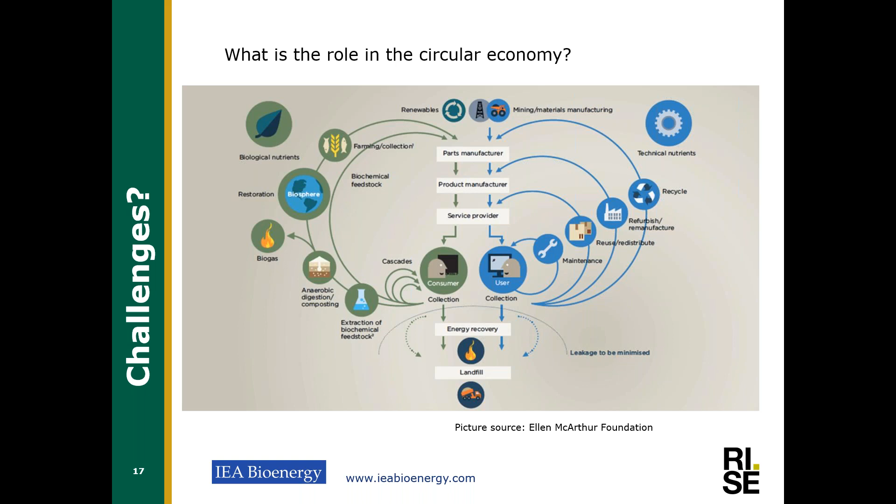One aspect that's become quite large in Sweden now is that municipalities, as well as the government, are adopting a vision of having a fossil-free energy system, both energy and transport. Then you have the problem of how to tackle the plastic going into the waste-to-energy plants.

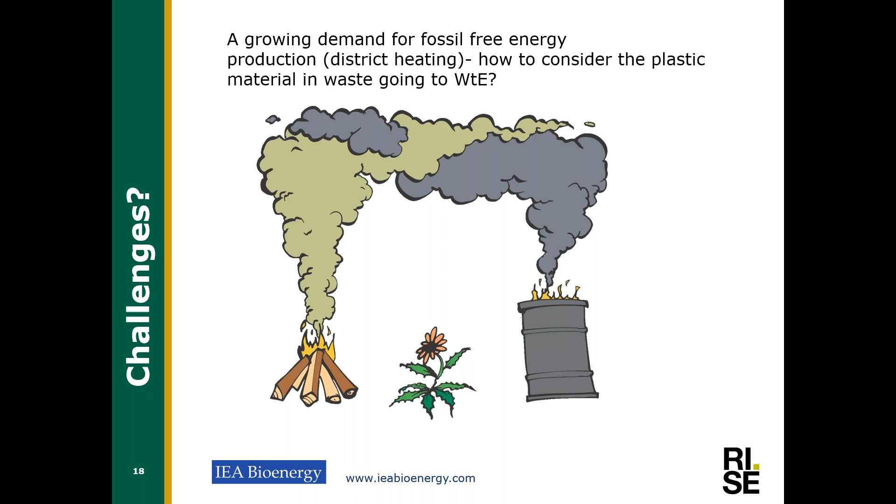There are definitely plastics today that neither the material companies nor the authorities want to recirculate into the technosphere, because they can contain flame retardants, PCBs, and other undesirable substances. I guess we will see if solutions like Enerkem or other feedstock recycling options with gasification, thermal cracking of chemistries, or biological methods can be a solution to that.

Residues and ashes were already mentioned by the previous speaker—that is a challenge. In many countries in Europe, the bottom ash or slag is used for construction purposes, for roads, parking lots, and other things. In Sweden today, not so much—it's used as construction material on landfills, but we haven't succeeded in getting acceptance to use it in roads. There have been some trials, but it's not widely used today, and that's also partly a legislation and policy issue.

What we do see is increased interest in recovering metals—in Switzerland they have a plant producing pure zinc from fly ash, looking at it as an urban mine. That's probably something that might come along more.

Legislation is a challenge, but it can also be an opportunity, like in the UK when they introduced the landfill tax. Another case is biogas: in Sweden the government decided to stimulate its use through an exemption on CO2 tax as well as energy tax, making consumption cheaper. Meanwhile in Denmark they put a production support in place, giving an incentive per cubic meter or megawatt hour of gas produced. The problem is that when the Danish export their gas to Sweden, they get both incentives—both the production support and the tax exemption. Legislation and incentives are important, but it's also important to coordinate them between countries.

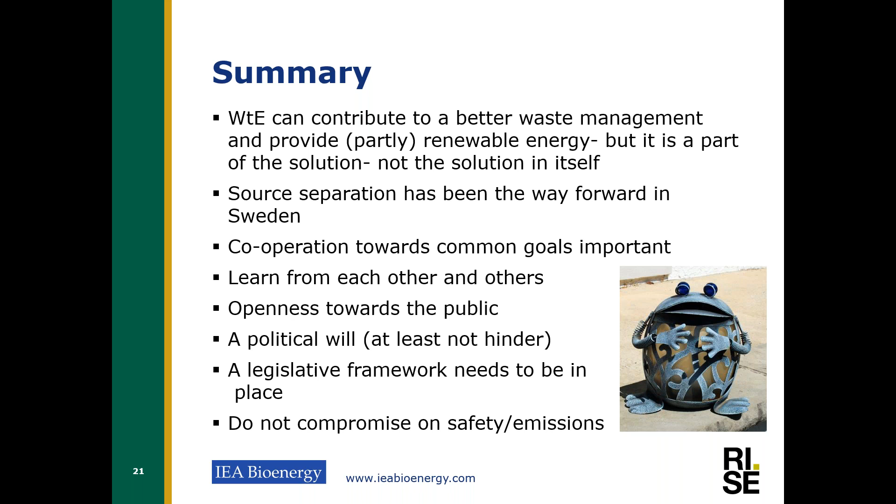We've worked a lot on cooperation between plants and companies to learn from each other, and on openness towards the public—not denying problems, because they will surface, especially today when information technology is so available. A scandal will not only face one plant, it will face the whole industry. You might need political will, or at least no active opposition, and you need the legislative framework in place, especially for waste management, but also for integrating waste management into the energy system. And do not compromise on safety or emissions, because that can kill the whole future for waste to energy in the business.

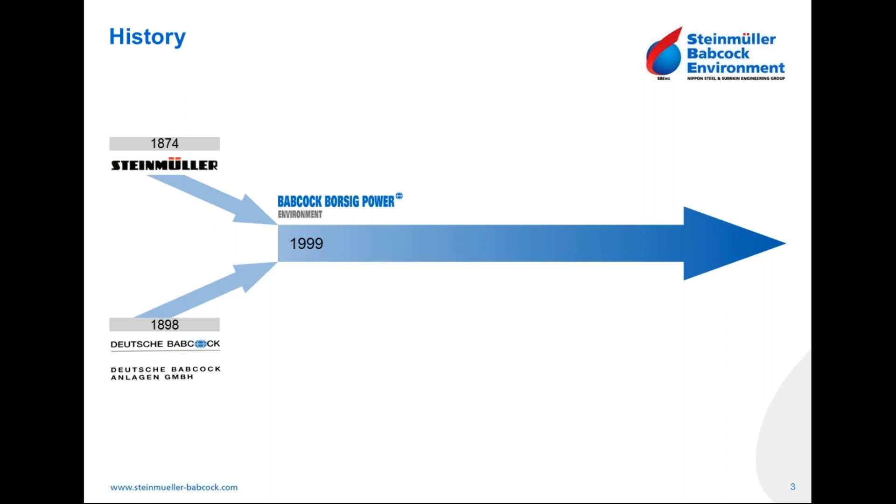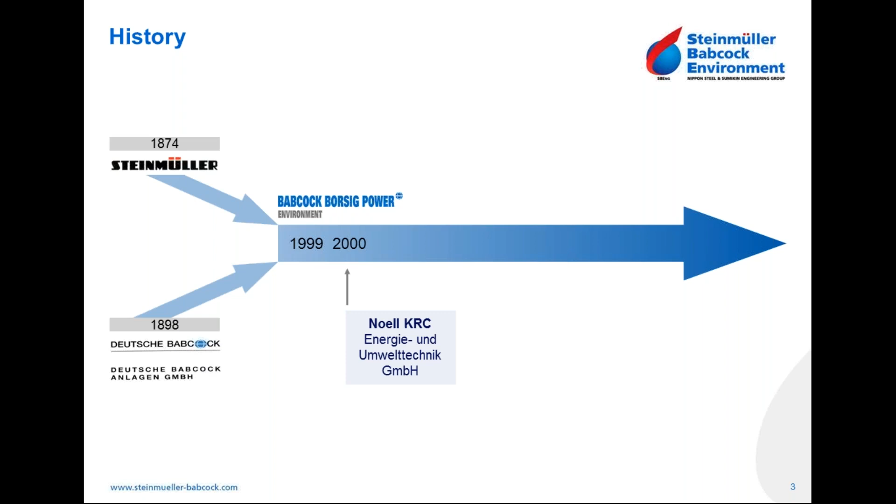Then, at the end of the 20th century, they merged with each other, and they created two companies from Steinmüller and Deutsche Babcock: one is Babcock Borsig Power Energy, the other Babcock Borsig Power Environment, in which we are now operating. After 2000, the company also became involved Noell KRC in this group. They also installed waste energy plants and environmental technologies. And in 2002, the company was totally separated from the Babcock group and taken over by the Italian company Fisia Babcock.

It operated starting in 2002 under the umbrella of Fisia Babcock Environment, up to 2014. In 2014, the company was taken over by the Japanese company Nippon Steel, and since 2014 we are operating under the name Steinmüller Babcock Environment. That's a very short historical overview of our company.

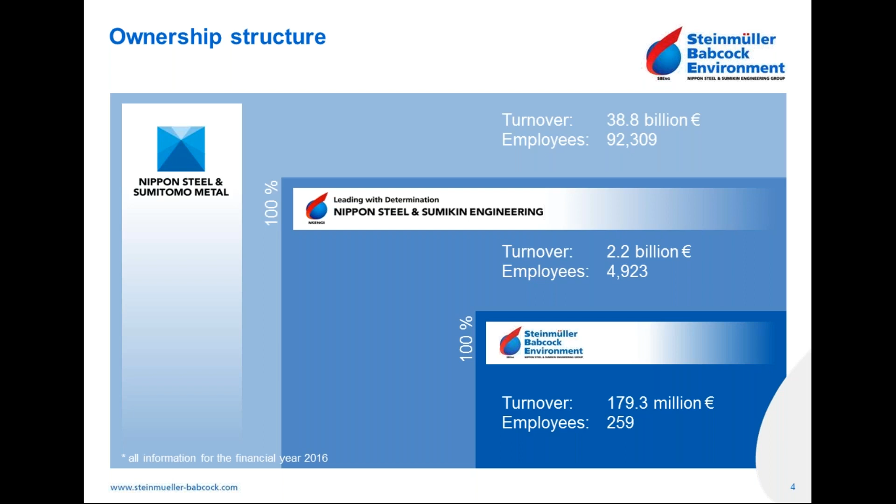That's fine. Okay, now our company is a middle-sized company with a number of employees, nearly 250 people, most of them engineers. We have an average turnover value each year of about 180 million euro. Our mother company, Nippon Steel & Sumikin Engineering, located directly in Japan, Tokyo, has a number of employees nearly 5,000 people, with a turnover about 2.2 billion euro each year. The mother company of the mother company, our top company, is Nippon Steel, the second biggest steel producer in the world after Arcelor, and they have about 90,000 employees overall in the world.

Our head office is located near Cologne in Gummersbach, Germany. We also have a mother office located in Tokyo. Overall in the world, we have some branches, some cooperation partners who have taken our licenses.

Our company is a typical engineering company. We make all waste energy plant components, all basic and detail engineering. We have a project management system for the execution of projects, a quality, health and safety management system, and procurement and logistics organization. We also do construction and commissioning, meaning we are a typical EPC company for installing waste energy plants.

Now we are coming to our core topic, energy from waste, how we can handle the waste and produce energy from it. Worldwide, our company has 646 references until now. Most of them are installed in Europe, second is in Asia.

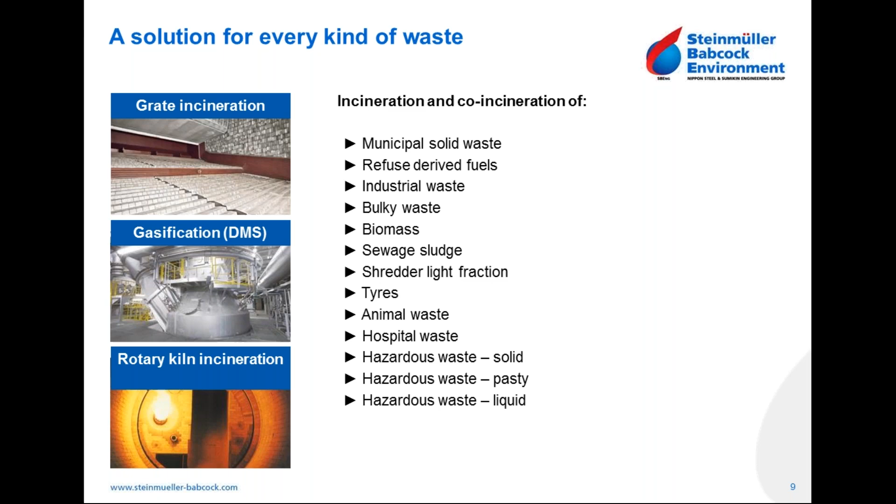In this combustion chamber, the grate system, the waste will be burned, incinerated, and also moved from the beginning up to the end of the grate. During this process, all waste will be burned, and all slag and non-burnable materials will be removed from the system.

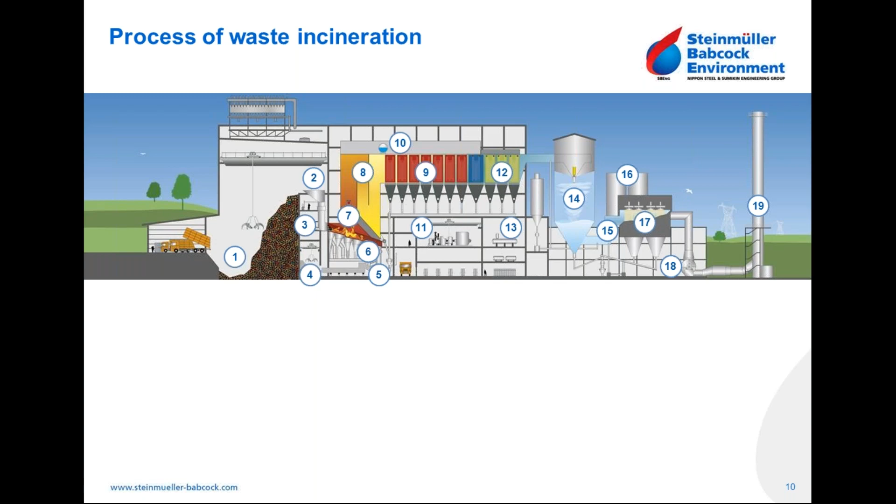We have also another process in our house: DMS gasification, direct melting system. This process is mainly usable for island countries because in this reactor, waste is put in together and melted directly by means of additional oxygen injection and coal injection to increase the temperature in the reactor. All waste will be melted, then from the bottom of the reactor you get slag and metal directly from this system. The amount of metal and slag is much less than with normal incineration, because we have a temperature level in this reactor up to 1700-1800 degrees.

The flue gas cleaning system after this reactor is more or less the same as in the incineration system, but the slag amount compared to waste incineration is much less. This system is more expensive than waste incineration in operation and installation, but it makes sense if you have island countries like Japan, or other island countries, because you can reduce the landfill volume which will be needed also after the waste incineration system.

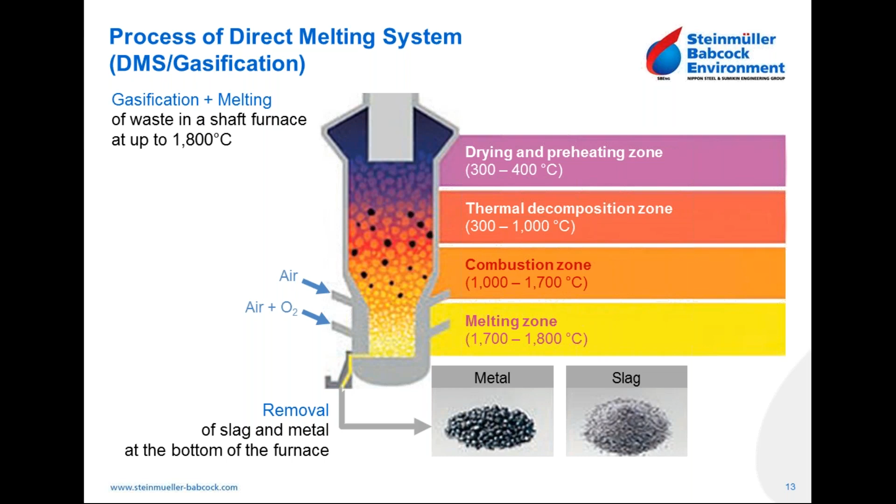I would like to show you a few highlights from our history, from our references. For example, we have installed one waste to energy plant in Herten, Germany, with 6 lines. Of these, 2 lines are for hazardous waste and 4 lines are foreseen for municipal waste. Hazardous waste uses a rotary kiln system, and municipal waste uses our forward moving grate installation system. All lines are installed by our company, and we are producing 52 megawatt thermal energy each line, with another smaller line producing a bit less. We are burning in these two lines, each line, 17 tons per hour of waste.

Another one of our biggest waste to energy plants we have installed in Italy, Acerra. We have 3 lines, each foreseen for a waste amount of nearly 30 tons per hour, and we are producing 113 megawatt thermal each line. Each line is connected to one steam turbine, and we are producing electrical energy for the 3 lines together of about 120 megawatt. This is one of our biggest waste to energy plants installed until now. I would draw your attention to the caloric value of this waste - it is one of the highest, 15,000 kilojoule per kilogram. Only in that way could we produce this high energy from our system with 30 tons per hour.

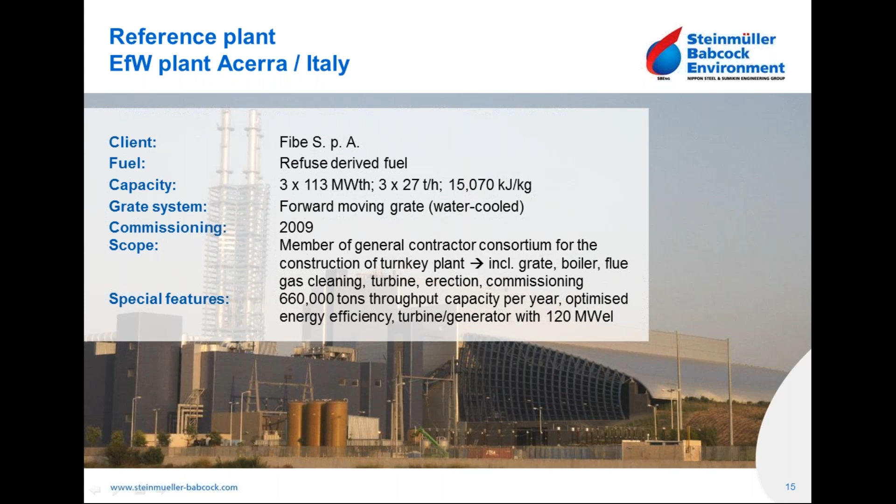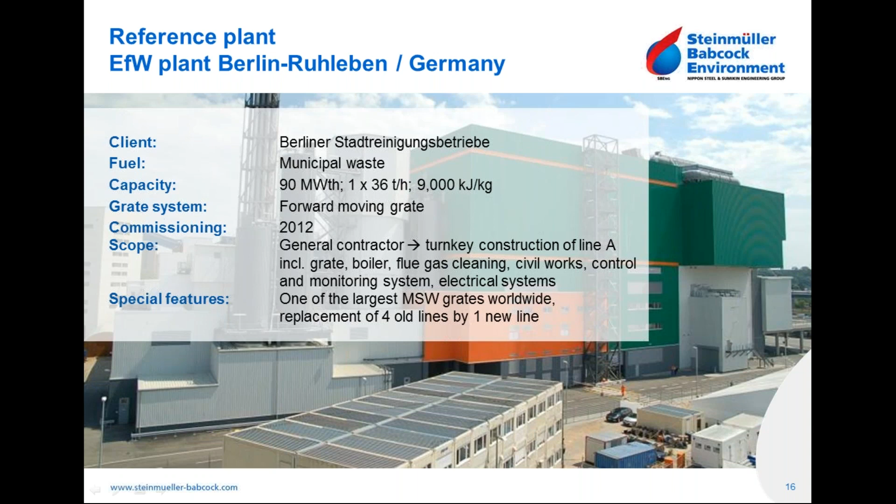Another example from Berlin - we have installed one of the biggest grate systems there. With only one line we can incinerate 36 tons per hour of municipal waste, and we have a boiler capacity of 90 megawatt thermal. This plant is installed as EPC directly by us - everything planned, installed and commissioned by our company. We were the general contractor.

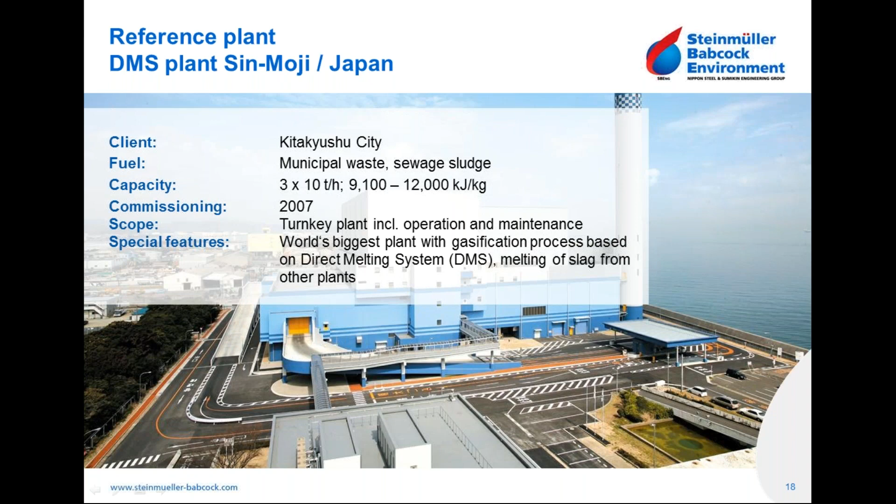Another example in Lithuania - we have one of the biggest grate systems installed, for a capacity of 34 tons per hour, with a boiler capacity of 85 megawatt thermal. An example for the DMS direct melting system in Japan - we have 3 lines, each foreseen for 10 tons per hour, where waste with a caloric value between 9,000 and 12,000 kilojoule will be melted.

I want to give you with this presentation a short impression of how our company is working, which technology we have, how we can reduce the volume of municipal waste, and what references we have. I hope it was useful for you. Thank you for your attention.